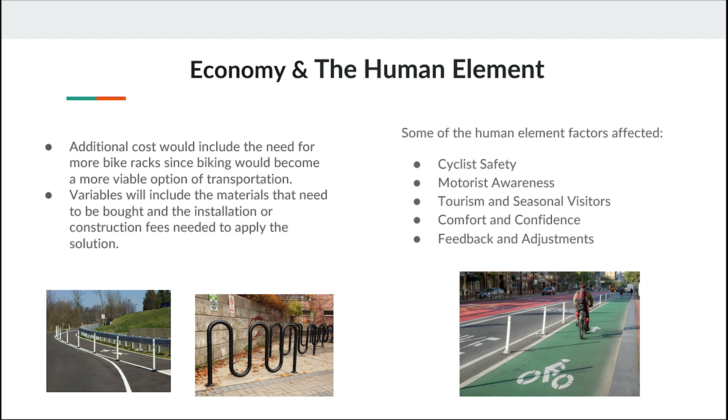The economy would be affected since there would be the added cost of the material that would separate the road and the bike lanes, and also the construction and installation fees, plus any additional cost of any bike racks that would be installed. And some of the human element factors affected would be cyclist safety, motorist awareness, tourism and seasonal visitors, comfort and confidence, and feedback and adjustments.

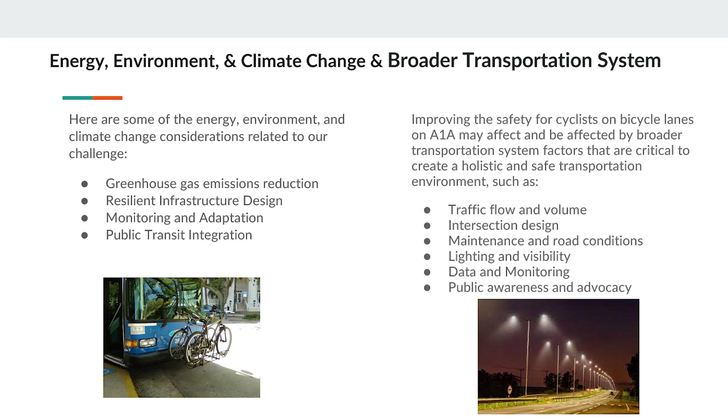Some changes related to energy, environment, and climate change that should be considered are the greenhouse gas emission reduction, the resilient infrastructure design, the monitoring and adaptation, and the public transit integration. And also some broader transportation systems that are affected: the traffic flow and volume, intersection design, maintenance and road conditions, lighting and visibility, data and monitoring, and public awareness and advocacy.

We believe that the lane poles are the best and most affordable way to improve security for cyclists at A1A, and to verify that hypothesis, we will create a more elaborated survey to get all the information necessary, and also try to separate a specific part of A1A to display the lane poles.

Thus, we will measure the percentage of accident reduction in that area and monitor the feedback of both drivers and cyclists through our survey. We are right if the number of accidents reduced significantly during the test period, cyclists feel safer, non-active cyclists start riding again, and drivers are more alert next to the poles.

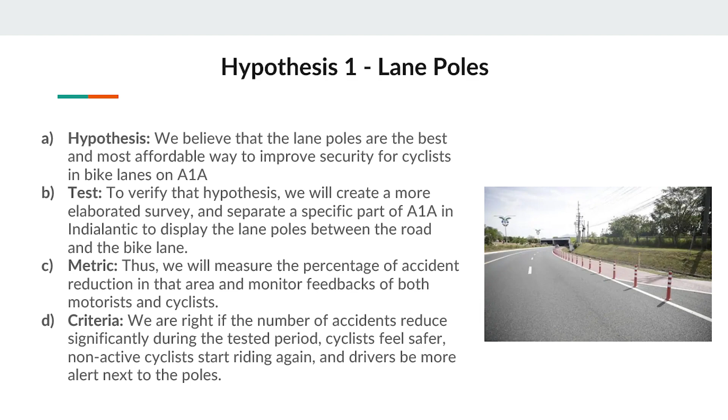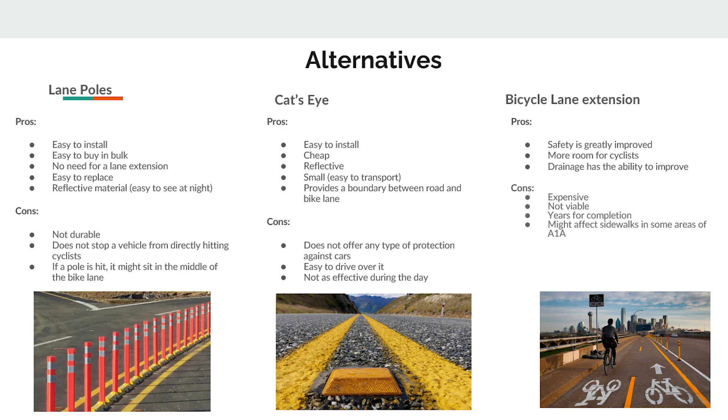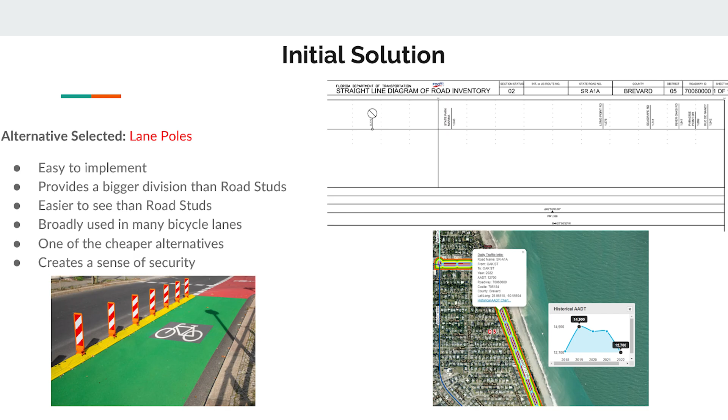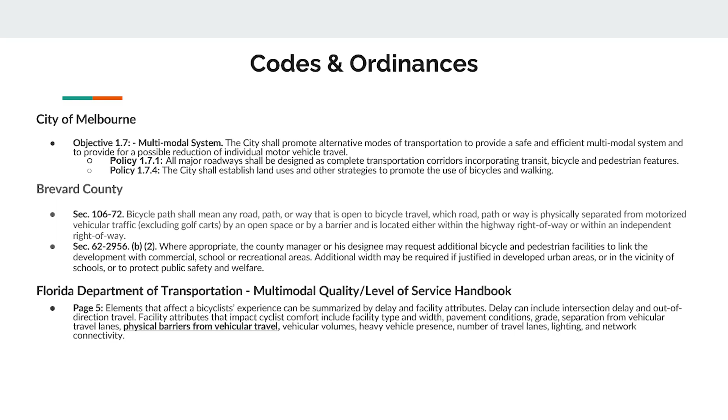As for the codes and ordinances used for our project, we have examples from all 3 of the City of Melbourne, Brevard County, and the Florida Department of Transportation. Each of their respective Municodes or service handbooks generally have some sort of codes that specify the want and the benefits of having multimodal levels of service on roads, such as options to use bicycles on those roads. All 3 of them view it in a positive light and have their own regulations surrounding it, which we'll get into a little bit later.

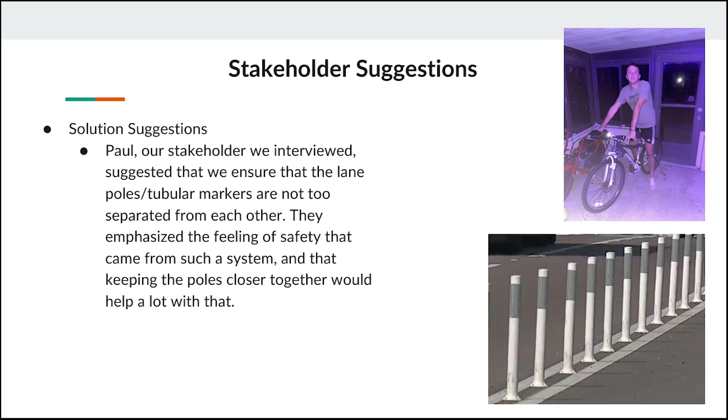Our stakeholder suggestion was from Paul when we interviewed him. He let us know that if the poles were not too separated, that it would emphasize the feeling of safety. So that's when we decided also that our poles would be 2 feet apart. For our solution, we decided to take in stakeholder advice and feedback of keeping the lane poles relatively close together, but not too close to the point where our cost would be very high. We thought 2 feet in between them from center to center would be a good balance in between.

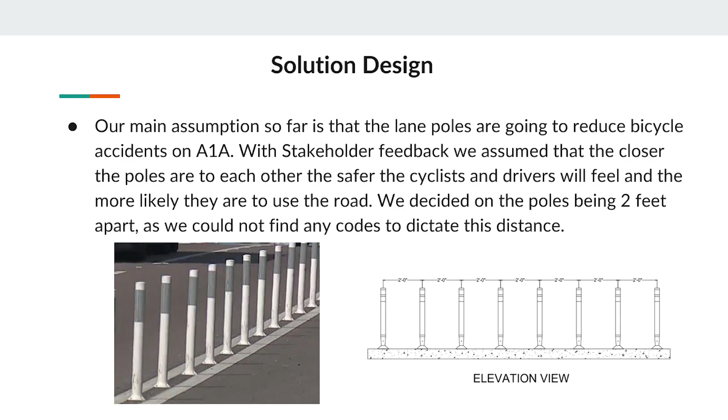You can see on the bottom right there an elevation view drawn to scale in CAD based on a design we found on the FDOT specifications website and approved products list that we'll talk about in the coming slides here.

About our lane pole hypothesis, we believe that the implementation of lane poles is the most affordable and best way to improve the security of cyclists at A1A, and we observed that 84% of people that answered our survey would feel safer with our solution. From that, we learned that separate bike lanes are the top factor in deciding to ride, and lane poles are hard to be ignored by drivers. Therefore, with this information, we were able to improve our learning, and we will be able to discuss it with City of Melbourne.

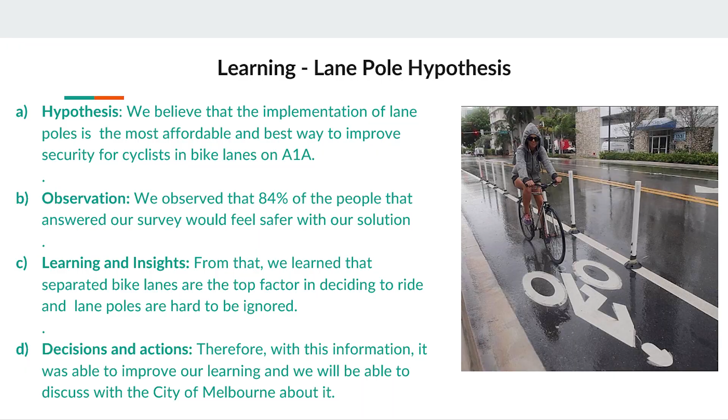Here are the lane pole details that I previously mentioned that we drew in CAD based on the ones we found on the FDOT approved products list. We decided on white as our color as it intrudes less on the aesthetic of the area surrounding A1A. They have 2 3-inch reflector wraps at the top to improve visibility during the darker hours of the day. They also have a drain hole at the bottom and a small base, as you can see there on the right.

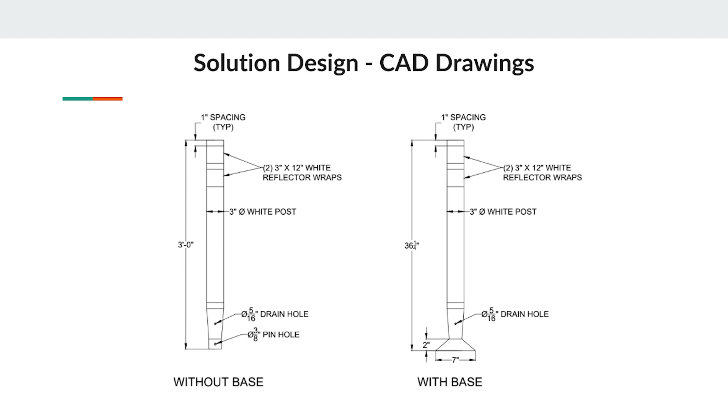To reference the codes we touched on a little bit earlier, the City of Melbourne Municode has several instances where they wish to promote alternative modes of transportation to provide a safe and efficient multimodal system. And as it stands currently, we do not believe that is the case. Even if the bicycle lanes do exist on A1A and other roads within Melbourne, no one is using them because they do not feel confident in their safety while using them, thus making them not as appealing as an option to use as transportation for the people who live here.

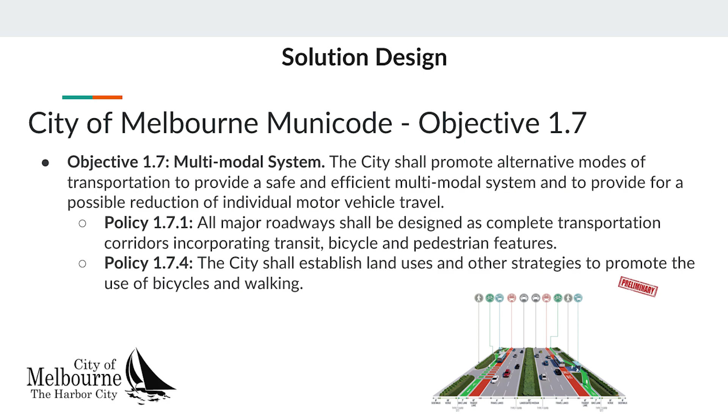In fact, while we were driving to the film site of our video, we saw about 4 people riding bicycles, none of which were using the actual bike lanes afforded to them by the road. All of them were using the sidewalk on the southbound section of the road, even if they were traveling north.

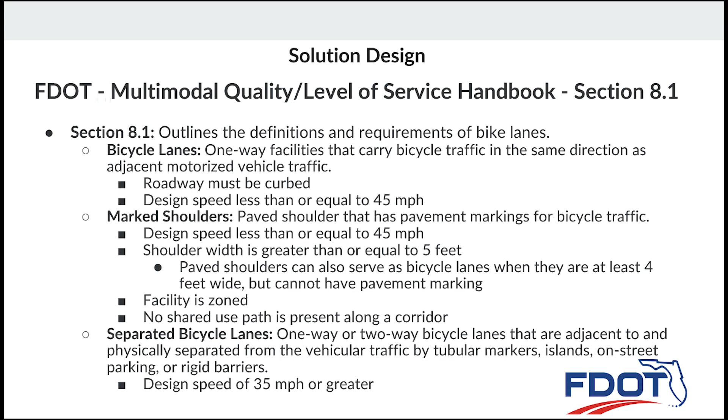Onto the codes provided by the FDOT, specifically those found in the Multimodal Quality and Level of Service Handbook, Section 8.1 on bicycle lanes. There are 3 different classifications for bicycle lanes. We believe A1A has marked shoulders as the design speed is less than 45 miles per hour, and it meets the clause that paved shoulders can also serve as bicycle lanes when they are at least 4 feet wide.

And after driving through A1A the other day to confirm our suspicions, there are certainly sections where the shoulders are less than 4 feet wide, even though they are still marked as bicycle lanes. The bicycle lanes at some points are even completely phased out, especially during right turns, and it's entirely unclear where the cyclist should continue their path.

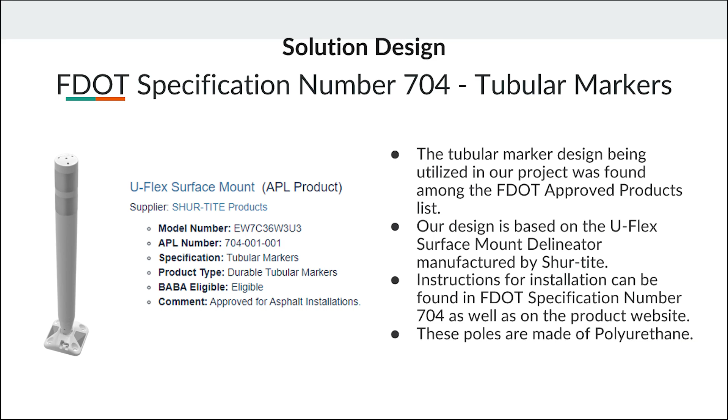Referring to FDOT specification number 704 for tubular markers and its respective approved products list, we decided that our lane poles used would be U-Flex surface mounts supplied by Shur-tite products, as they do not interfere with the aesthetic of the area too much, and they have installation instructions found on both the FDOT website and their respective website. These poles are made of polyurethane and are bound to the pavement with an epoxy resin.

For our project cost, we're calculating about 15,840 lane poles necessary for the 6 miles with those 2 feet of separation in between them. This isn't taking into account any of the extra separation that we need for the right turns or any other extra separations that we might need to be on the road. The materials would be the epoxy and the lane poles themselves, as well as then the labor, which we calculated to about 20 workers, and that would make 20 lane poles per hour.

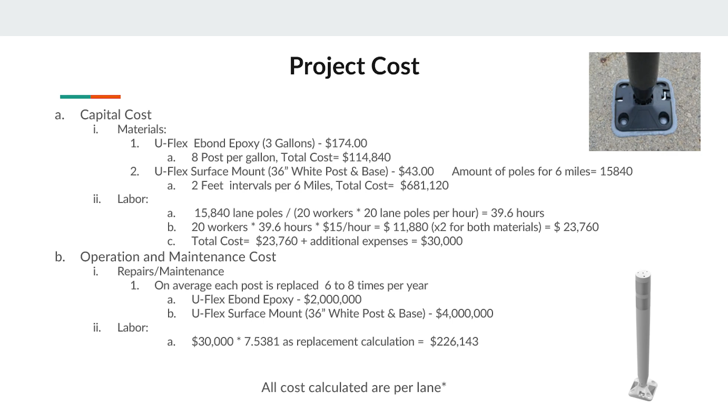The operation and maintenance cost: on average, each post would have to be replaced 6 to 8 times per year. That would also take into account the extra epoxy needed as well as the lane poles themselves. Labor is also accounted in there. It's also important to know that this is for just one lane, so we would need two since there's two sides of the road.

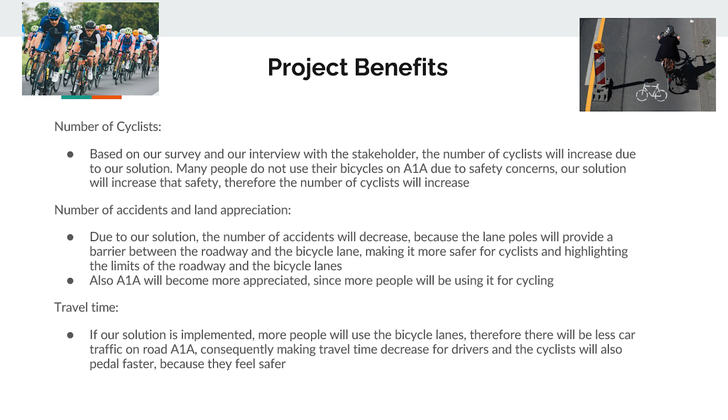The travel time will also be reduced. We'll have less traffic at A1A because more people will be cycling. If you live right at A1A and there's traffic for some reason, you can just cycle 2 to 5 minutes to a restaurant or a supermarket, and it will be way easier than getting in your car, and you will also save fuel and help the environment.

It's way more feasible than utilizing jersey barriers or bike lane width extension. It's way cheaper than jersey barriers. It's about double the amount of money to use jersey barriers, and we would also have to have a bike lane extension for the jersey barriers because their width is way bigger, and it would affect the roadway, and it wouldn't be very feasible. The lane poles are definitely the best alternative for our solution.

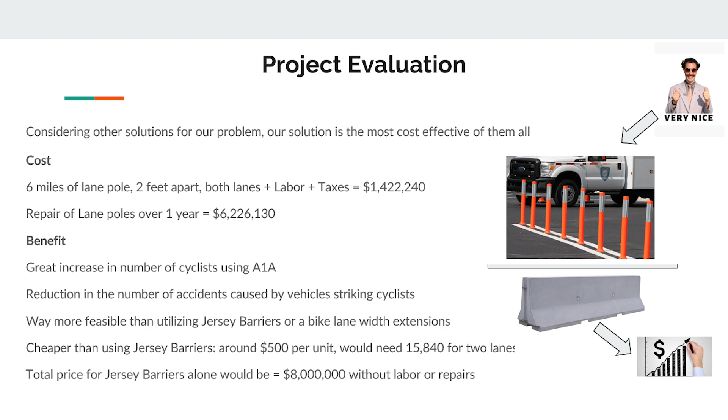Thank you, everyone. I hope you enjoyed our video and our presentation. Our project, once again, the objective is to improve safety for cyclists on State Road A1A by utilizing lane poles between the roadway and the bicycle lanes.